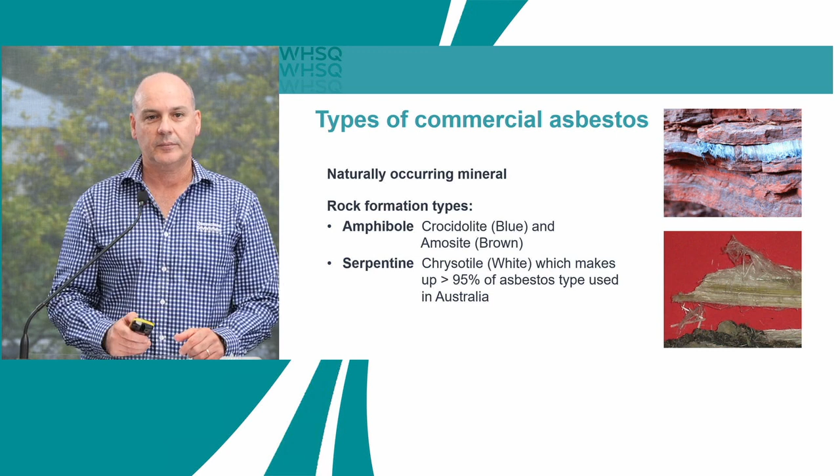So why is asbestos used extensively? It's in over 3,000 building products in Australia. They mined it extensively - it was cheap to mine, easily accessible. It's got great flexibility, high tensile strength, insulates from heat, and it's non-conductive and chemically inert.

So on the 31st of December 2003, Australia prohibited the importation and use of asbestos in building products, but back in the mid-80s is when Australia stopped making these products. Up until that point, they were allowed to stockpile and keep selling. So generally, if your house is built after 1990, we like to think you've got an unlikely chance of asbestos being in your home, whereas if it's built before 1990, there's a high chance that you've got asbestos-containing products.

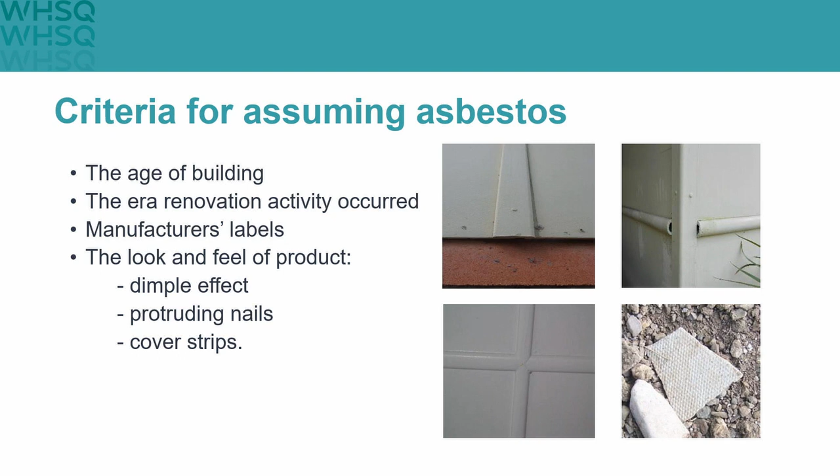When you're looking around your home, there's a few things you could look at to identify which might make you think you've got asbestos. The age of your building - pre-1990, or if you had a renovation between that 50s and 90s era - you might find manufacturing labels on the back of your cement sheet products, or the look and feel of the product. You can see like a dimple back picture imprint on the back of the cement sheet - that's a good indication it could contain asbestos. The old cement sheet's quite hard, so the heads on the clouts might sit proud of the cement sheet, or you might have cover strips sitting on your sheets.

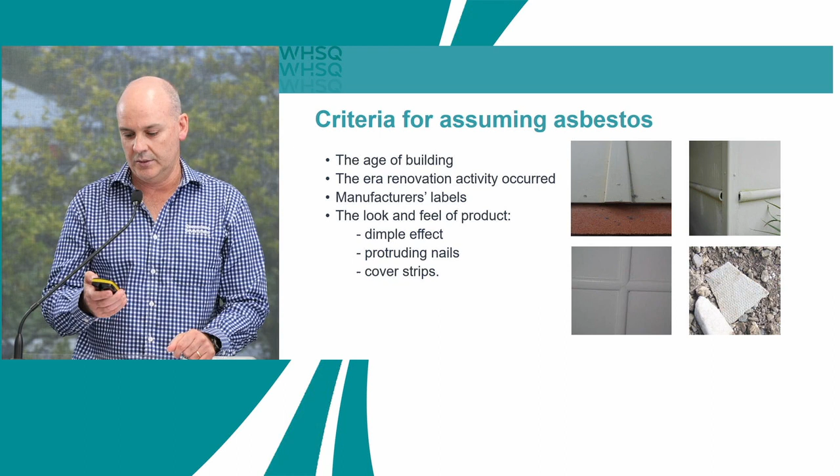There's 3 main diseases caused by asbestos exposure: mesothelioma, lung cancer and asbestosis. Generally your risk factors of getting those diseases is how much you breathe in, how long you breathe it in for, and how often you breathe it in for. That also depends on the size and shape of the fibres that you breathe in, and as a rule, it's the ones that you can't see that are most dangerous. There's also individual risk factors - if you're a smoker, you have a much higher chance of getting lung cancer.

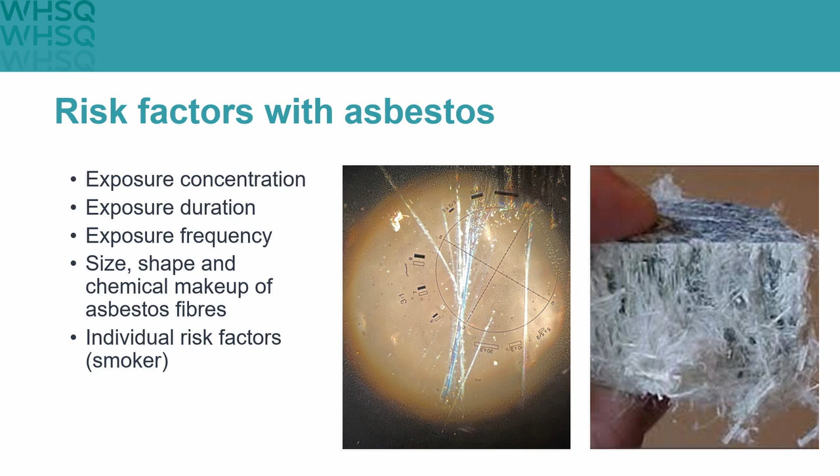It's important before you do any work in your home that you identify where the asbestos is. Go to the asbestos.qld.gov.au website, we've got some great pictures that will identify it. If you're unsure, you should always get it tested, and take the sample to a NATA accredited laboratory. That's the only testing methodology Workplace Health and Safety Queensland accepts. If you don't want to take the samples yourself, you can ring up one of the laboratories and they'll send a technician around to take those samples for you.

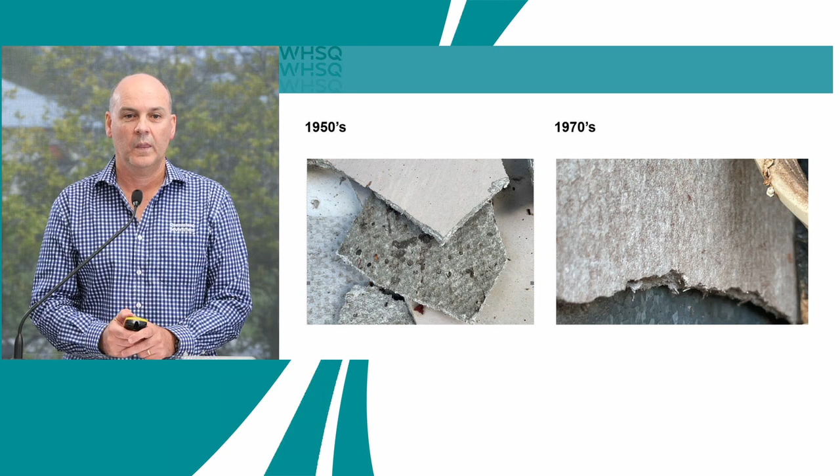There's no one identifying feature of an asbestos product that will give you an indication it's asbestos. The picture on the left is a cement sheet from the 1950s, it's got a dimple back, it's grey. Then you've got one from the 1970s, much smoother, and it's a pinky colour. So don't be fooled - this cement sheet is pink, that doesn't mean it doesn't contain asbestos.

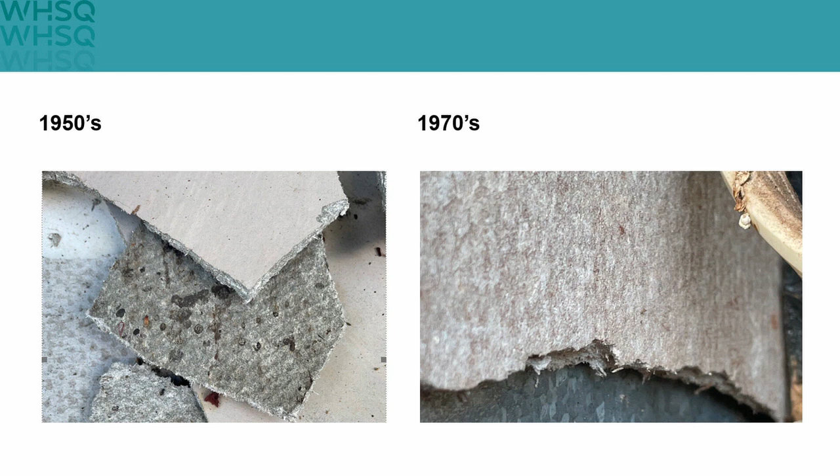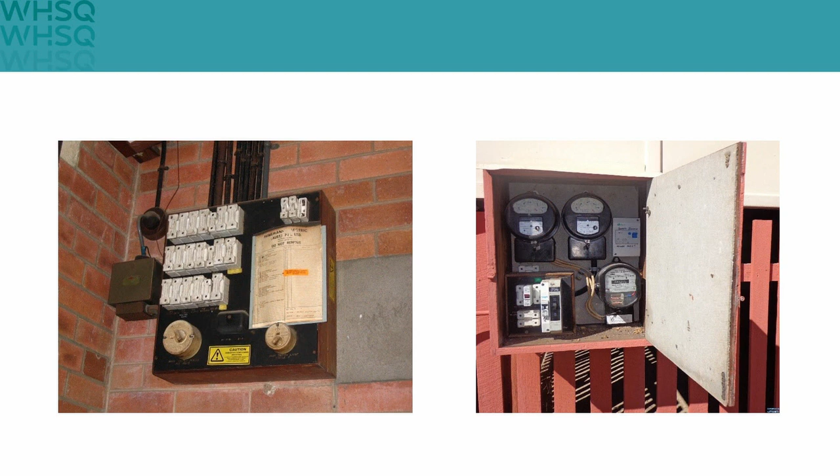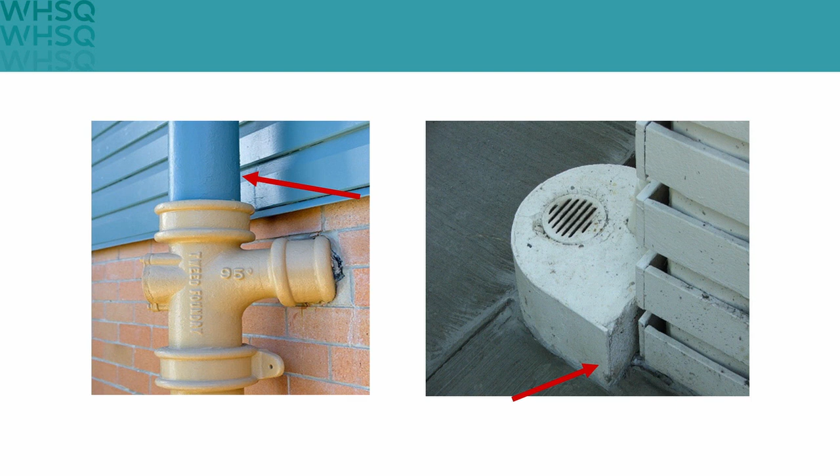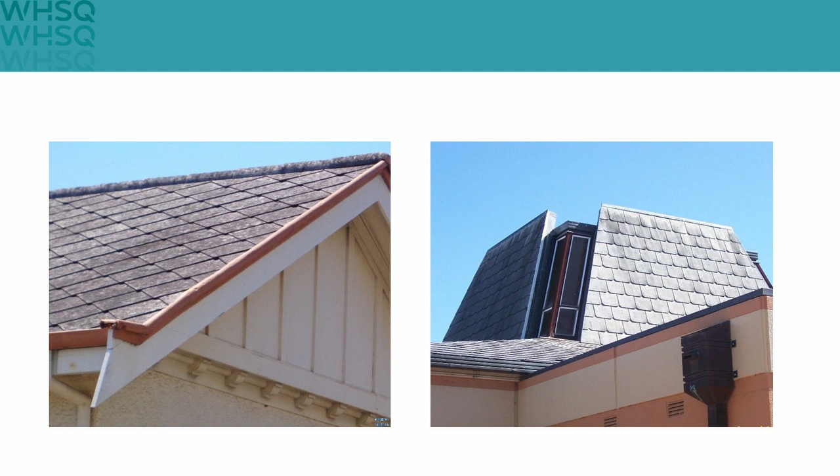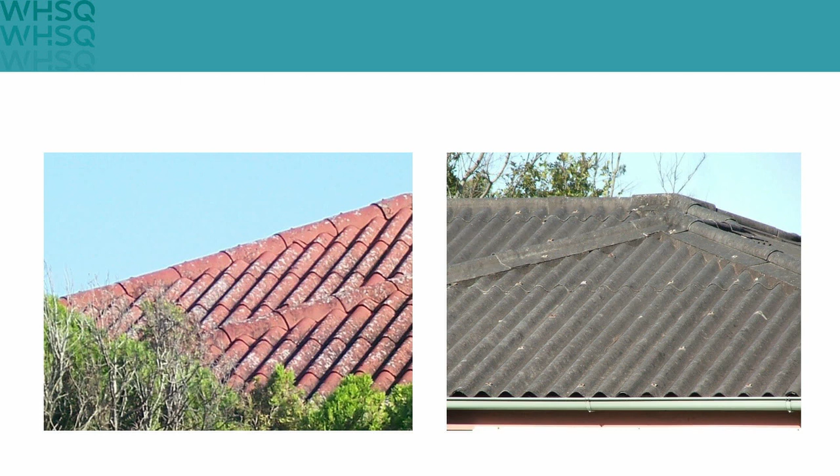A couple of hints you could have an asbestos roof: the sheeting's much thicker than your normal tin roof, and if you look at the bolts or screws holding the sheets on, they'll have a little diamond washer underneath as well, and the ridge capping is quite a lot larger than it is for tin sheeting.

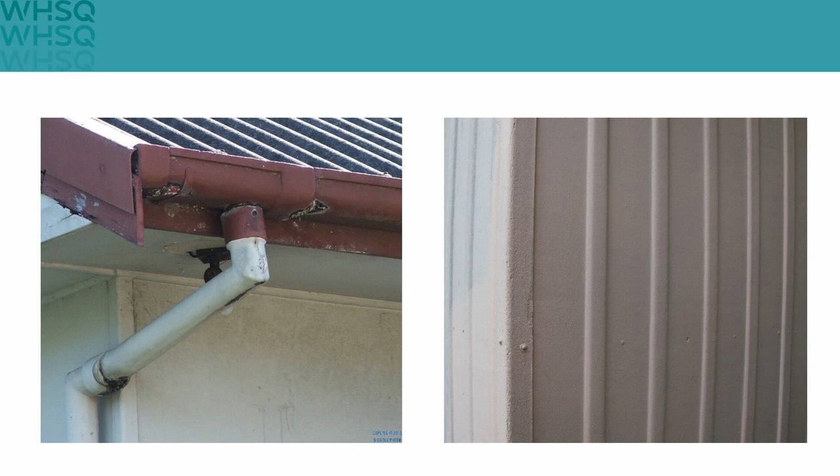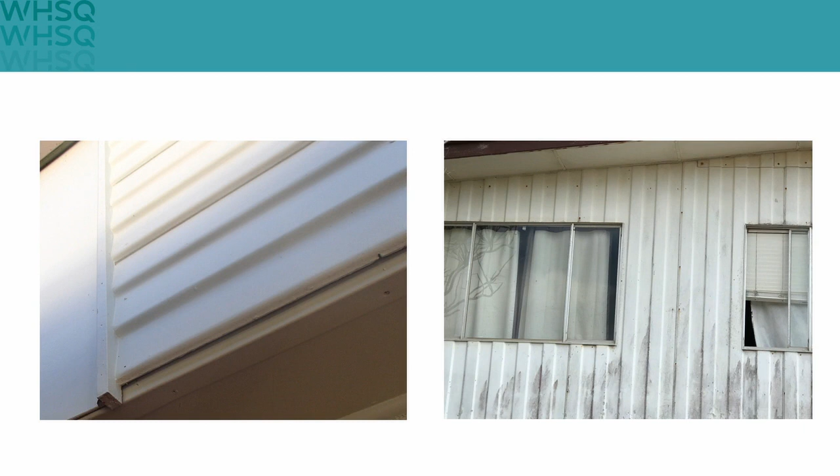Picture on the left, got some log cabin, and the picture on the right, we've got some stucco sheeting.

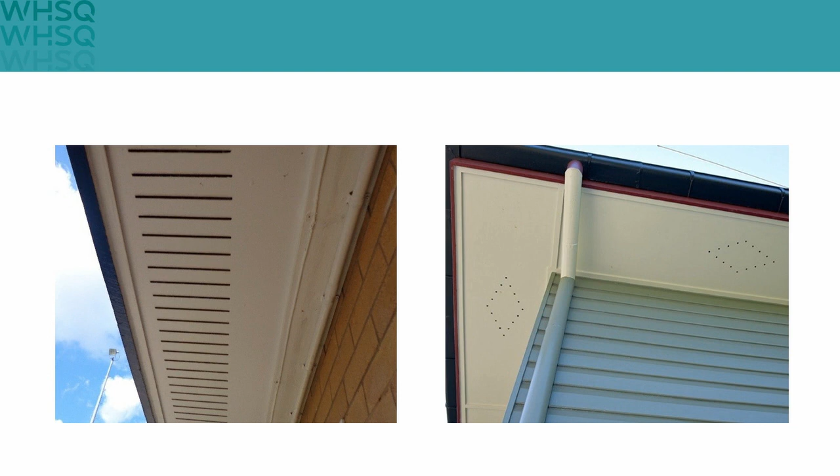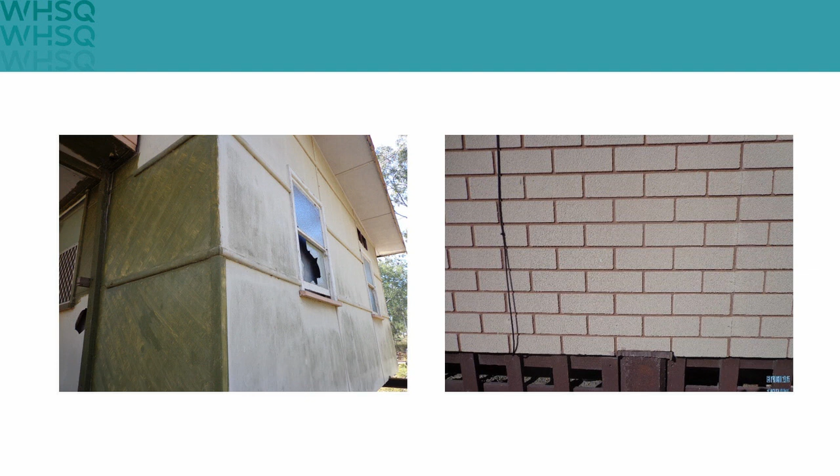Again, flat cement sheet on the picture on the left. You can see this one's got timber cover strips, and on the right we've got faux brick - that's a stencil brick that's covering asbestos cement sheet.

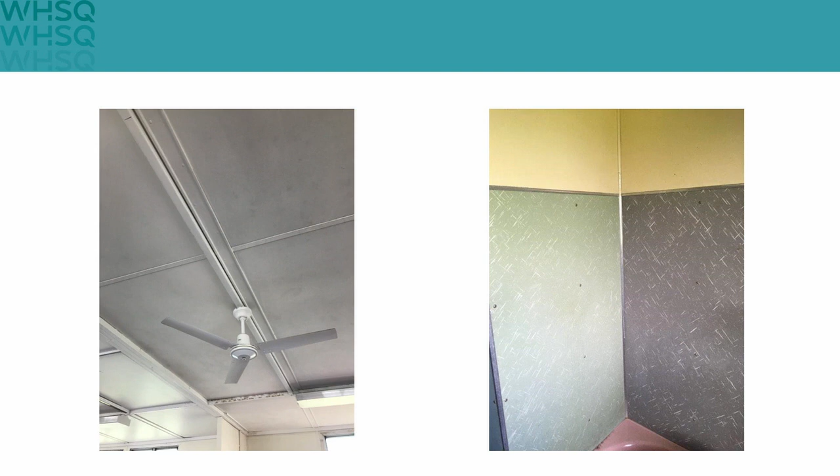Floor coverings: floor tiles on the left, they're a non-friable product, and on the right we've got vinyl. If you've got a vinyl that's got grey backing, it's likely going to be asbestos, and that's a very high content of asbestos in that grey layer at the back - that's a friable product and you should not attempt to touch this yourself.

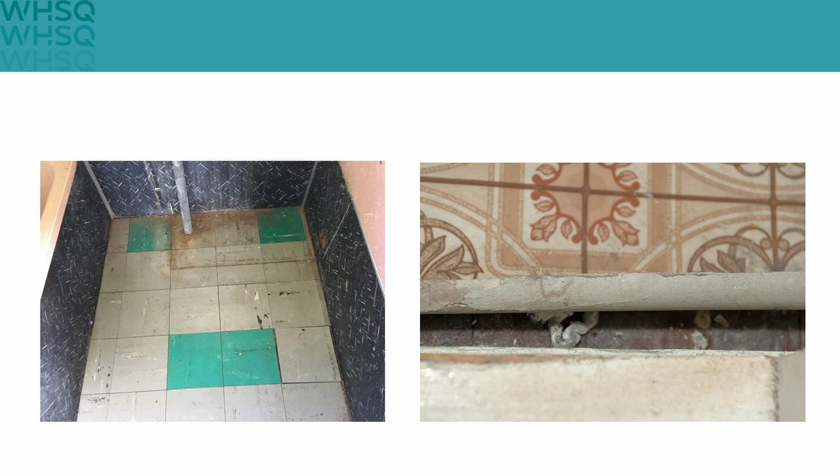Here you can see a picture on the far left - with the nails, they sit flush or can be countersunk in LDB, versus asbestos cement sheet in that middle picture where the clout head is sitting proud. And in that right-hand picture, you've got a screwdriver that can easily push into the LDB product.

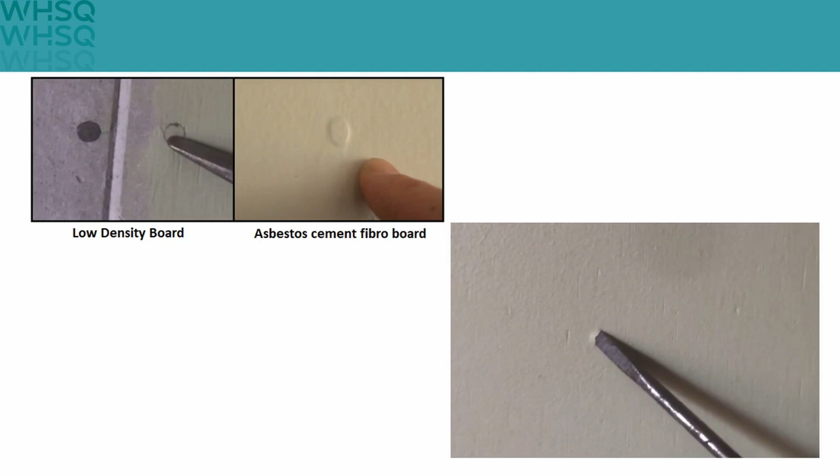Some ceiling tiles that are perforated are LDB, and the picture on the right is the back of one of the sheets that has an Asbestolux sign on it. So don't assume that if you can't find asbestos-like signage on it, that it's not LDB.

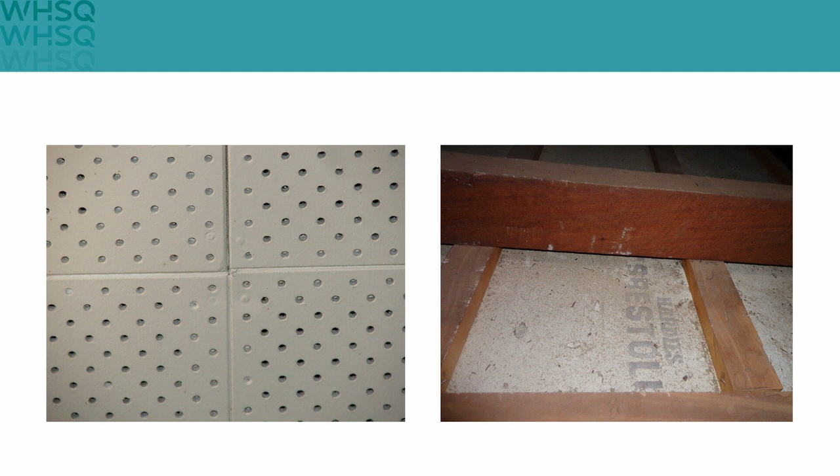Don't become a victim and start your renovation without identifying asbestos. In this instance, the person tore down some LDB walls and they've contaminated their whole house.

Workplace Health and Safety Queensland recommend that if you're going to do any work on asbestos, you engage a licensed asbestos removalist. However, we understand that's not always going to be the case, so we ask you at least to obey the law and engage a licensed asbestos removalist if you're going to be removing greater than 10 square metres of non-friable asbestos, if you have any friable asbestos, or more than minor quantities of asbestos dust and debris.

Whenever you do asbestos-related work or some small asbestos removal, you've still got to follow the same processes as an asbestos removalist. You need to be able to identify all your hazards. Asbestos is one hazard when you're dealing with asbestos, but you might have electrical hazard, you might have a fall from height hazard as well, so you need to make sure that you've dealt with those.

You need to indicate your asbestos removal area, so that's normally putting barricading up and some signage so people know what you're doing and they're not going to come in and walk in unprotected.

You need to wear personal protective equipment. Now you need to make sure that that's appropriate for what you're doing and it fits correctly so you've got the best protection. You use wet methods of removal, which means you're just spraying down the asbestos sheet with water as a low pressure spray.

You want to use the correct tools, and that's normally hand tools, tools that will help you pull out nails and pry sheets from the wall. You need to be able to decontaminate yourself and the area where you've worked in, and you need to make sure that you've wrapped your waste and disposed of it properly.

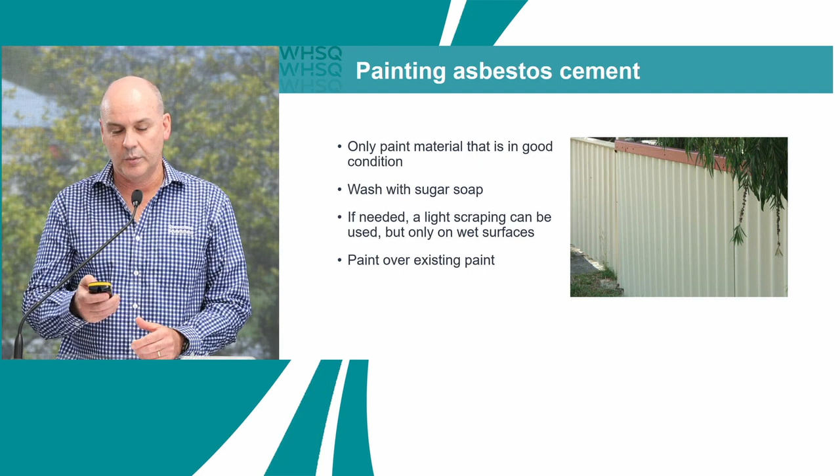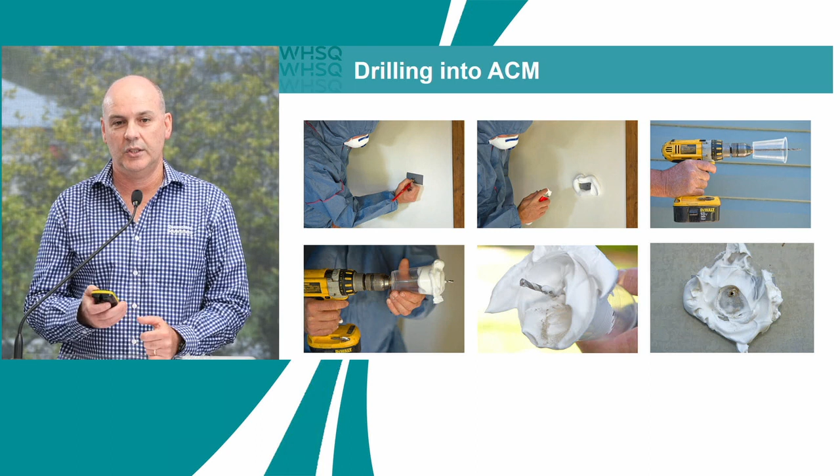If you need to drill a hole in asbestos material, we recommend you put some tape on where you're going to do the hole. The tape helps support the edges of the hole so it stops it crumbling when you drill through. Then you put some shaving cream in a circle around the hole where you're going to do it and use a disposable cup. You put shaving cream in the cup, and when you put that up against the wall, the shaving cream that you've put on the wall and in the cup captures all the material that's coming off the cement sheet as you drill through it, as you can see in those bottom two pictures.

If you want to remove some cement sheet, the process is fairly simple. You cordon off your area, you wear your PPE as discussed, wet down the cement sheet before you remove it to prevent airborne fibres being generated.

Avoid damaging or breaking the sheet. You remove it whole and that reduces the airborne fibres that are generated. Always use plastic drop sheets on the ground. That'll collect any dust and debris that fall down, and it's easy to wipe up and then get rid of the plastic, dispose of as asbestos waste.

Make sure you decontaminate yourself, you can use a spray and spray your suit down, gently roll it off so you're not generating airborne fibres, and wipe your boots down with a wet rag. Always try and do removal in a well-ventilated area, because if you do generate any airborne fibres, they'll be able to dissipate.

When you're cleaning up, using a wet rag with a bucket, you only dip that wet rag in the bucket once, and you use the face of the wet rag, wipe it on the surface until that's contaminated, then fold it over, get a new face, and keep wiping until that rag is full of debris. Again, decontaminate yourself and dispose of the waste correctly.

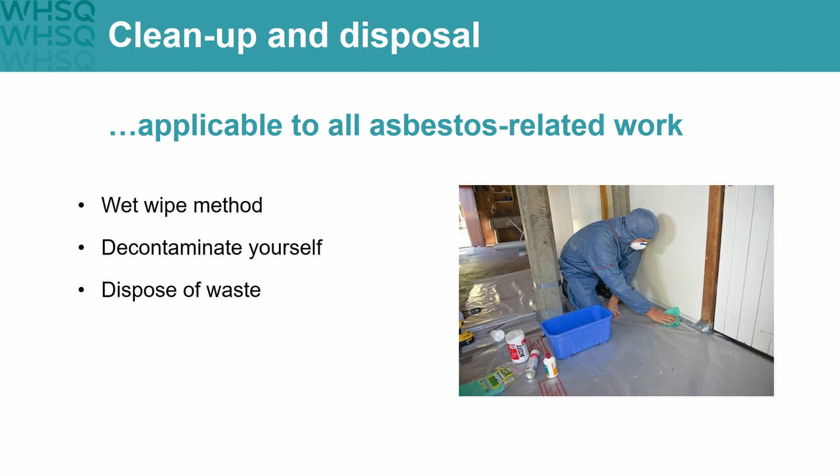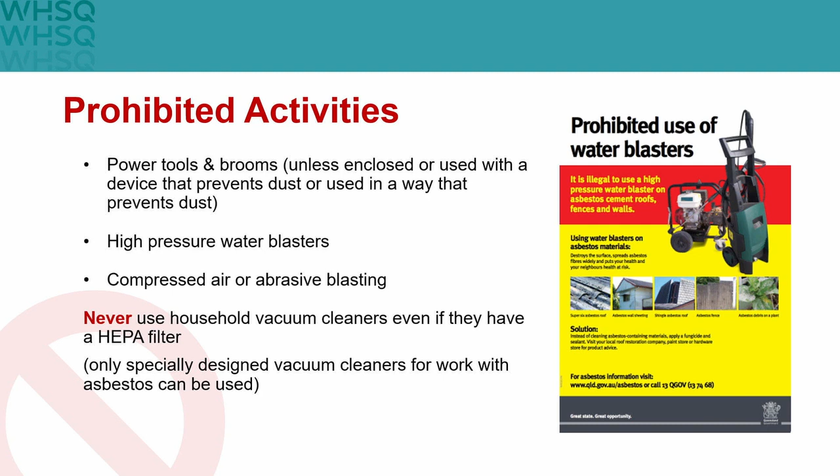So there are a few prohibited activities in the workplace health and safety regulations. Power tools and brooms are not to be used unless enclosed or used in a way that prevents dust being generated. You're not allowed to high pressure water blast asbestos, and you can't use compressed air. If you're doing any asbestos related work at your home, do not use a household vacuum cleaner. You'll contaminate your vacuum cleaner and it will need to be thrown out. The only vacuum cleaners that can be used for asbestos work are industrial H-class HEPA vacuum cleaners.

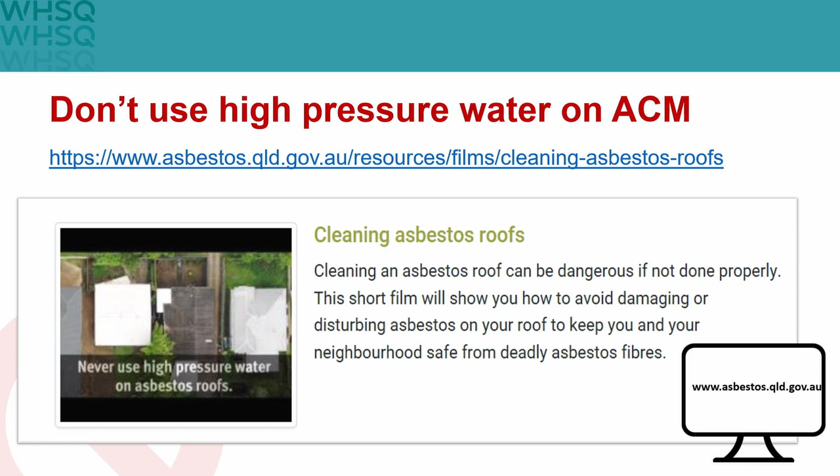So if you need to repaint your roof, please have a look at this video on our website. It goes through the process of preparing the asbestos roof for painting. If you high pressure spray your roof to clean it, you will contaminate your yard. It destroys the top layer of the sheet, putting it into your yard and your two neighbours' yards, and you'll be responsible for paying for the cleanup, which could cost you in excess of $80,000.

If you want further resources on how to do asbestos-related work or a little bit of removal, you can go to the asbestos.qld.gov.au website, where we have some safe procedures. Or you can go to the 2 codes of practice, how to safely remove asbestos or how to manage and control asbestos in the workplace. The appendices in these two codes of practice give you examples on how to safely drill into asbestos material or how to seal it and paint it.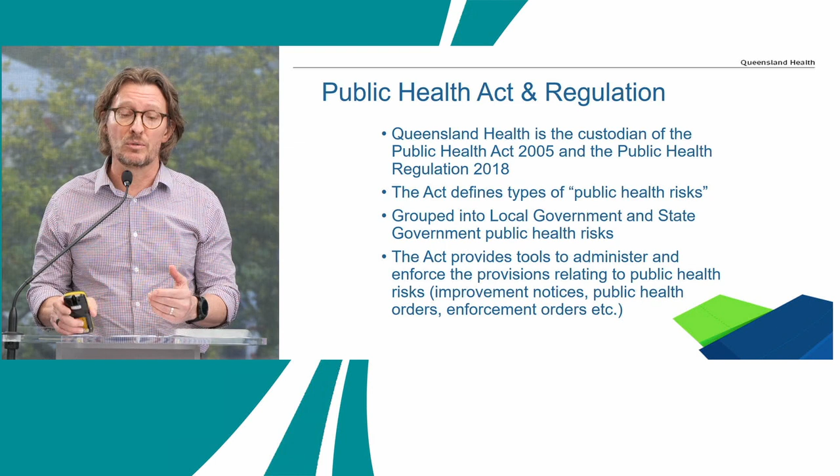Now, when we talk specifically about asbestos as a public health risk, the legislation captures asbestos as a public health risk under section 11(1)(b)(viii) of the Act, and this includes dispersal or release of a byproduct of manufacturing, construction, repair, alteration, cleaning or demolition work at a place other than a workplace.

Now, the Act also allows for other matters to be prescribed under a regulation, and as you'll see further on, there are a number of additional public health risks defined within the public health regulation.

And then lastly, asbestos is defined as a local government public health risk, and what that means is that the state government cannot enforce local government public health risks, and local government cannot enforce state government public health risks, unless there is an agreement between the local government and the state government through the chief executives of the entities for one entity to enforce on behalf of the other.

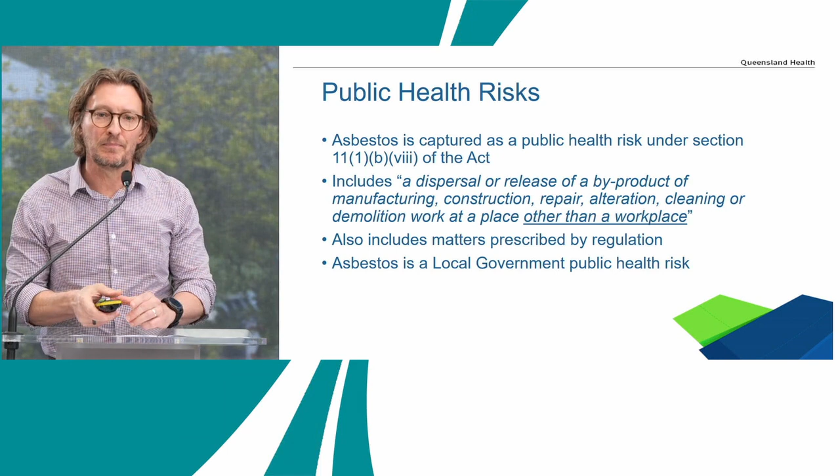Okay, so as I mentioned earlier, under the public health regulation, sections 7 to 13 are automatically public health risks. So some of those sections include, for example, the removal of friable or bonded asbestos containing material, so the removal of friable ACM.

requires a Class A asbestos removal licence, and homeowners, generally speaking, are not authorised to remove, or should not be removing, any friable ACM. So that is specifically a public health risk under the regulation.

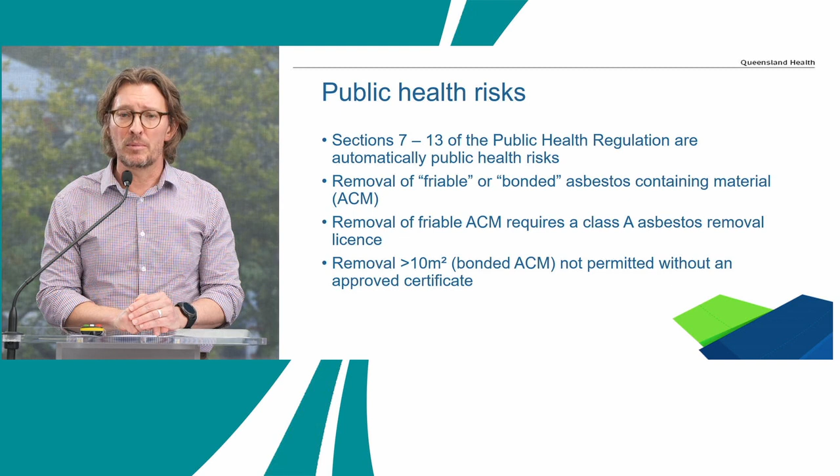The removal of more than 10 square metres of bonded ACM is not permitted without an approved certificate. So that's another public health risk.

Using power tools or high pressure water processes to cut or clean ACM is a public health risk. Under the regulation, a person is required to minimise the release of asbestos fibres if undertaking prescribed work, and prescribed work includes breaking, cleaning, cutting, removing or repairing ACM.

Packaging and disposal of asbestos waste is included, and there are specific requirements around how asbestos waste should be packaged and removed, and again, that is a public health risk. And lastly, the sale or giveaway of asbestos containing material is also a public health risk under the regulation.

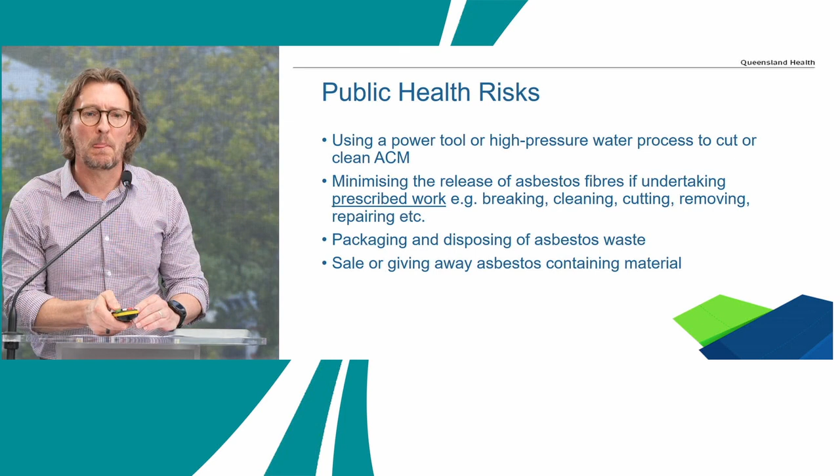So that is module CPCCDE3014, removal of non-friable asbestos, and the alternative is the online or face-to-face homeowner and do-it-yourself asbestos removal course offered by Keys Human Resources.

So in relation to the 10 square metre rule, or the do-it-yourself asbestos removal provisions within the legislation, Queensland Health has recently completed a public consultation on the 10 square metre removal provisions. Under that consultation process, there were three options that were presented. The first one was to retain the current 10 square metre rule as it is.

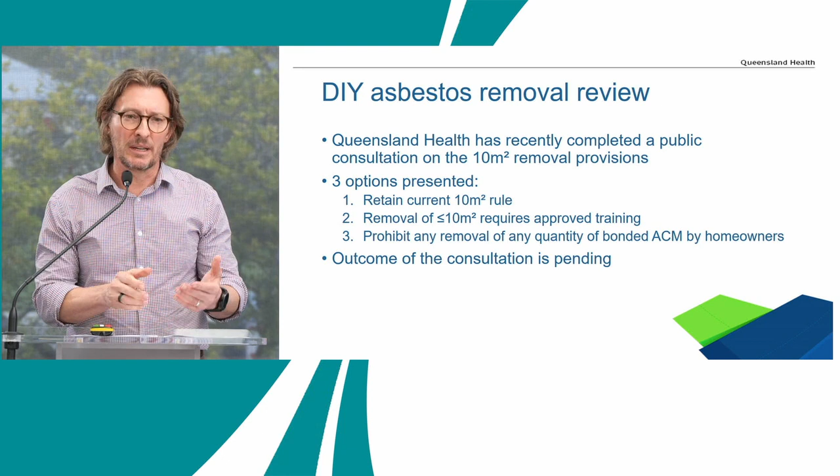So Queensland Health recommends homeowners engage a licensed asbestos removalist to remove and dispose of asbestos. However, acknowledging that under the legislation currently, a homeowner can conduct a limited amount of asbestos removal work without a licence, homeowners removing less than 10 square metres of ACM should comply with the How to Safely Remove Asbestos Code of Practice 2021, which is available on the whole of government website.

So just moving on to some of the powers under the Public Health Act in relation to asbestos. So we have authorised persons who are authorised under the legislation, and they have powers to investigate and enforce provisions within the Act and regulation.

So that includes things such as entry to places, searching places, photographing or filming things, copying documents, or seizing and taking things.

An authorised person can give a public health order, which can require a person to stop doing certain things. For example, a public health order could require a person to stop carrying out asbestos removal work, or if they had undertaken asbestos removal work and severely contaminated their home, it could require them to cease using the place as a residential premises until it had been made safe.

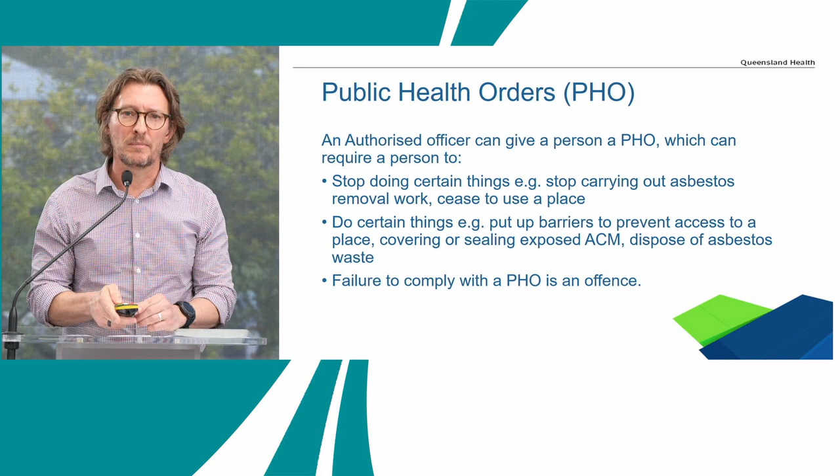A magistrate can authorise a local government to enter a place to carry out work required under a public health order if the order has not been complied with, and the costs of that work may be recouped from a landholder. In addition, if a neighbouring property has been contaminated by a landholder, the neighbouring landholder may also be able to recover costs of clean-up from a responsible person.

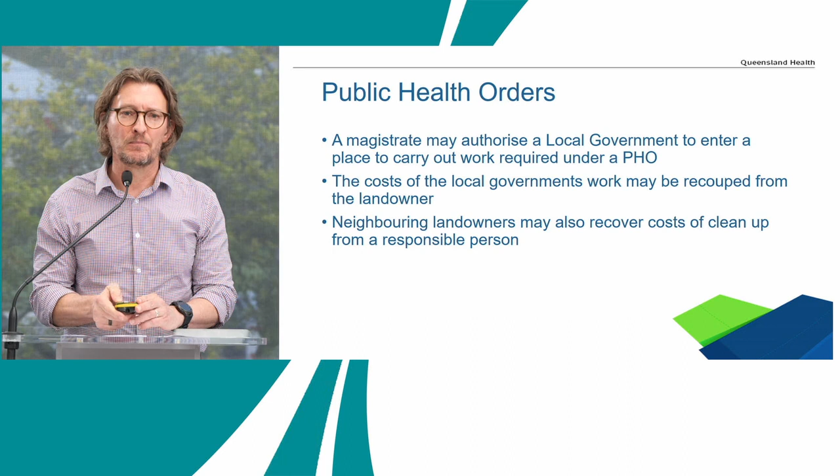There are offences under the Public Health Act and the regulation for non-compliance. Under the regulation, there are penalties of up to 100 penalty units, and authorised officers can also issue penalty infringement notices of up to 10 penalty units or fines. The current penalty unit value is $154.80, and there are also avenues for prosecution for failure to comply with a public health order or enforcement of public health orders.

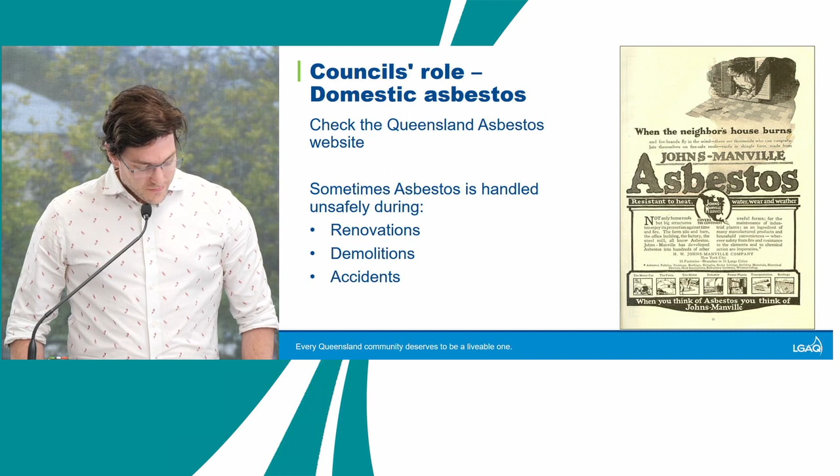Sometimes you or your neighbors might not be handling things as safely as you should. And that's really when the council gets involved, to look at the things my colleague Jim has been talking about. They're specially trained officers who know what they're doing, and they really try to help minimize the damage. It's not about trying to punish you for doing something wrong — it's about trying to help keep you, your community, and your neighbors safe.

And yes, as Jim mentioned, there are penalties that can be used, but those are only used if really necessary. So if a council officer comes to your renovation, they are there to help you, keep you and your neighbors safe, and get everything back on track and doing the right thing. So that is role number one for asbestos removal.

The second one is landfill management. Not all landfills in Queensland are owned by councils, but councils own a fair few of them, and they are really the key resource to identify where you can dispose of hazardous materials if you have them in your house or want to transport them.

So before you set off, after you've properly packed and removed the asbestos from your house, before you go to the landfill, please take a look at your local government website or give them a call and ask: where should I bring it? Who has the right to actually store that hazardous material at the landfill? That not only saves you the frustration of going to the wrong place and driving around with hazardous material in your car, but also provides you with information on who to call, how long beforehand, and whether there are any fees or charges for transporting that material to that particular landfill.

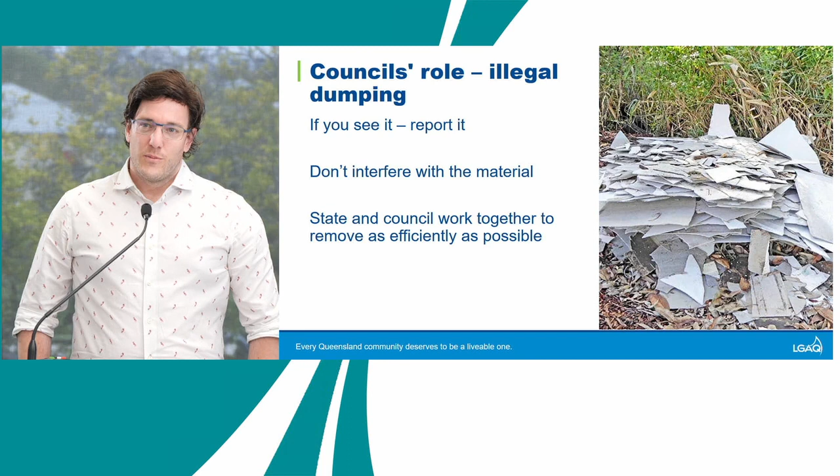And that's really a good case for why Queensland has developed such a sophisticated interagency working group, as presented to you today, because we are all responsible for different parts of different acts, but if you report to one part, that part can then tell the other one who is responsible to do the right thing. It really shows that different levels of government can work well together, and all councils in Queensland are on board with that process.

So as a takeaway message, your council is here to help you if it's investigating an incident or making sure individual community members are compliant with the particular parts of the Public Health Act or the Environmental Protection Act or other acts that are relevant to asbestos. It's really to ensure that the community, you, your family, your neighbors are safe, and there is no further asbestos contamination that can endanger people that might not know it's there.

Not every council is the same. We are a really big state with really large areas, so the best first point of contact is your local government. If you give them a call, they can answer all your questions and put you in the right direction. Also, the Queensland government asbestos website can always give you key information if you don't find it otherwise. It's really a one-stop shop for all things you need to know when you think or you know there might be asbestos in your house and you want to do something about it.

I really want to thank you today, and I want to thank also the Queensland government and especially the Office of Industrial Relations for working so closely with local government on this matter. We couldn't be where we are if we didn't work so strongly together and really try to give the best for all Queenslanders. Thank you.